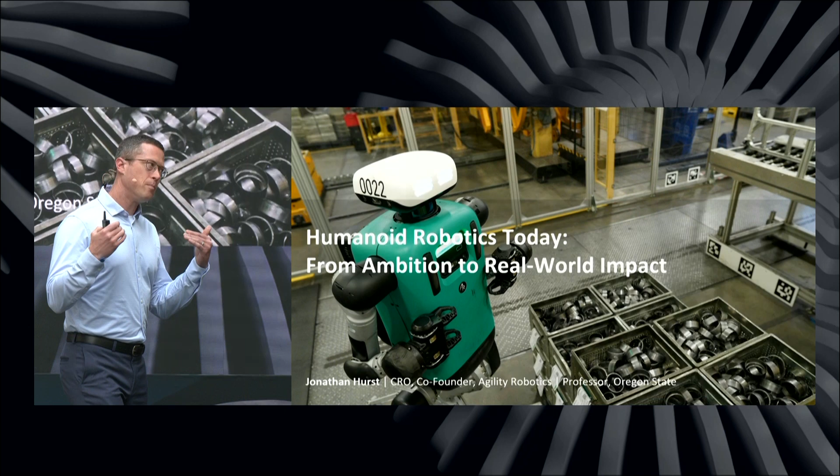I'm going to talk today a little bit about how we go from the ambition of having humanoid robots that are part of everyday human life, multi-purpose, useful in many places, but how we start with that, how we have real-world impact right up front on our path towards this big dream.

I think this is the best crowd to really agree with me that embodied AI is the future of labor. We're going to have machines that can physically do most of the things that people can do, and many more things beyond that, and that's going to fundamentally change how we do labor.

Today, it starts in things like logistics and warehousing and some simple, more focused tasks, but over time, it's going to gradually broaden towards more manipulation tasks, better and better dexterity, and other things to get out into more and more broad markets.

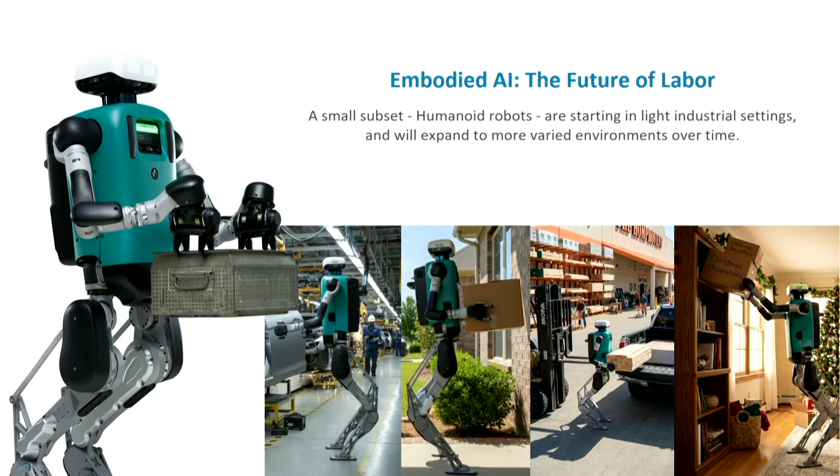There are two big main ways embodied AI broadly, but also humanoids, are going to impact our economy. Number one is basic capacity - just the limit that many industries have on the services they can provide to customers because there are not enough people to do the jobs and do the roles. Especially with demographics changing and population shifting, this is a really important one.

But also basic capability. You can ask the question, how many blacksmiths does it take to build a laptop? Of course, blacksmiths can't build laptops. You have to ladder up the technology to get to the point of creating something like that, and embodied AI is going to do that. Now that's the hardest to predict - it's hardest to know what we are going to be building in the future that these embodied AIs allow us to build, but I do believe this is going to be a major important factor in our economy.

So the big question is really important to ask, and it's important for anybody building humanoids to ask this: why a humanoid? Is it even the right way to do it, or should it be something else? I would say we are building human-centric robots because we want to operate in human environments.

And this is really a new era of robotics. Robots in the past have really - you've had to design the environment around the robots. Industrial robot arms, you design the process. Even AMRs, autonomous mobile robots, you have to have an environment and a space that's really suited for the robots.

But having human-centric robots is what allows them to be much more general purpose, more multi-purpose, because so many workflows have been designed around us. We've designed the workflows around us. So having a robot that can just walk in and do that workflow is very useful.

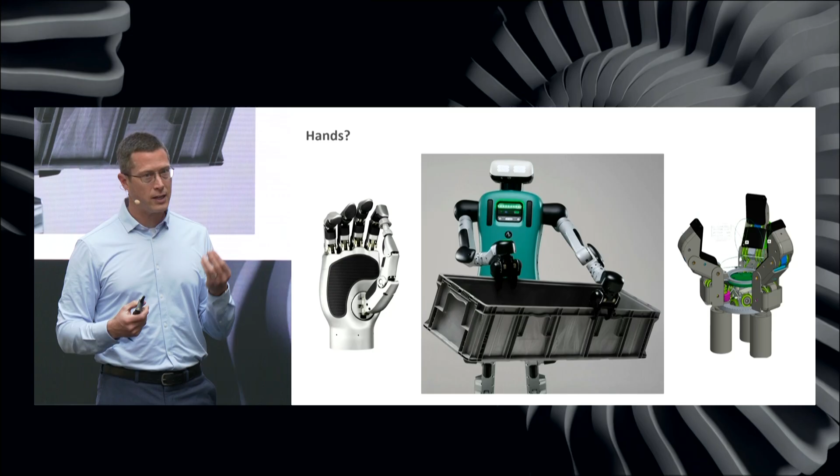Dexterity is one of the grand challenges in robotics. We don't do it well in robotics right now, certainly nowhere near human dexterity. And I think when you copy it, it's kind of like the Disney Hall of Presidents - it's an animatronic. It maybe looks on the outside a bit like a person, but it's missing all of the most important things like force control and compliance, and of course the intelligence in order to create that dexterous behavior, even if the hardware is physically capable.

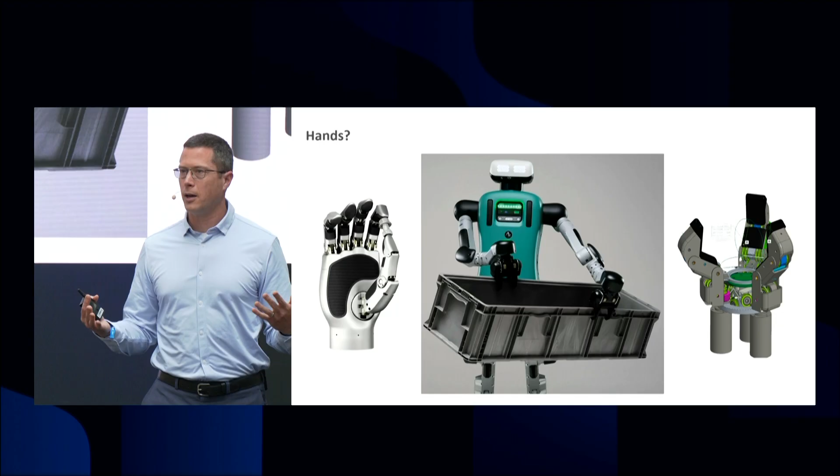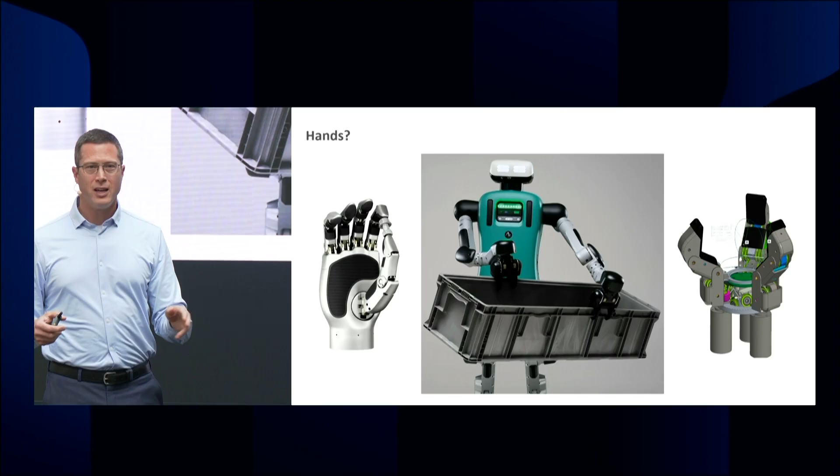Now, I think down the road, we may be going by 2 or 3 fingers to start with. We see in the Cybathlon, a competition in Europe where disabled people can augment themselves technologically by adding whatever they want - amputees can have manipulators, and then they do a manipulation challenge which just pragmatically measures what they can do. And the winner the last 2 years has been a parallel jaw gripper, a very simple parallel jaw gripper with a 1 or 2 degree of freedom wrist.

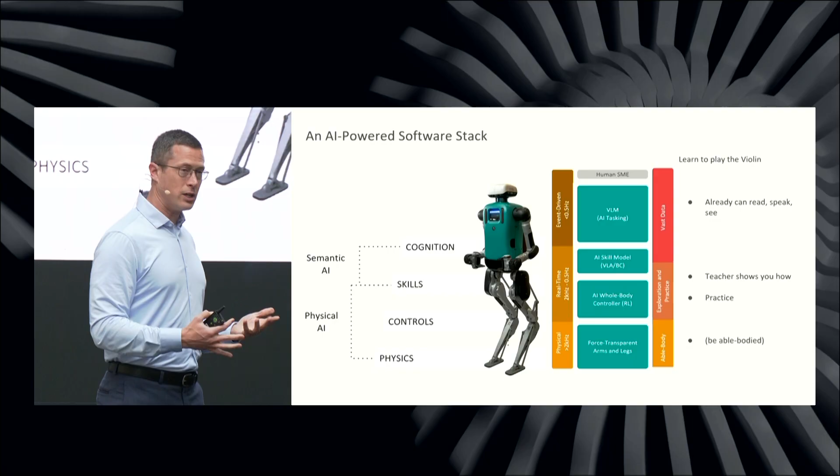So that tells us something about if we really want to achieve dexterity, we've got to think about this from the first principles approach and not just copy the way that people look. Now, the intelligence is a huge part also of how you need to solve this grand challenge of manipulation and whole body control and locomotion, all of these things.

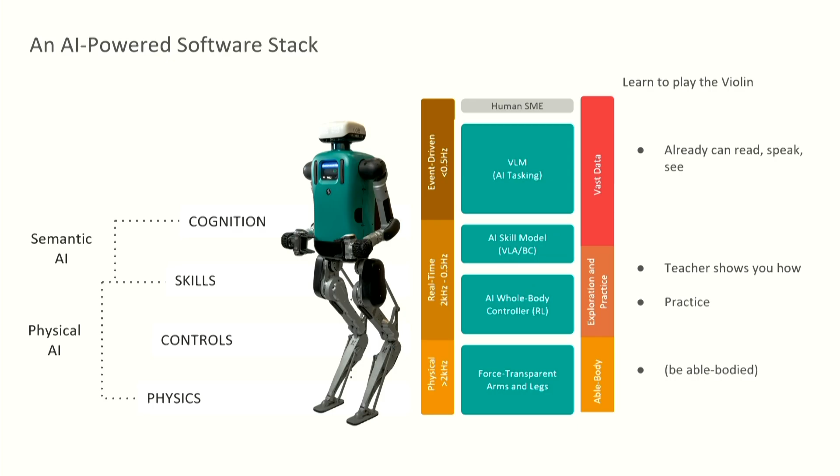And I think it's very important to point out that there is no single silver bullet. There is no black box of AI. There is a big tent of computational tools that are all very valuable in creating the behaviors that we want, and different tools are useful in different locations.

So I already talked about the hardware. It really has to be special. You have to get the physics right of the mechanical system. It has to be back drivable, have good force control, be able to have good compliant interaction with the world to make it even possible for any software, no matter what it is, in order to locomote and manipulate things in the world.

At the high level, at the very top of this stack, we see large language models and vision language models and things like that that could be trained off of the entire internet. And that helps with context and solves perception and so many things.

But it cannot control an individual robot. It cannot control the torques to all of the individual motors at every instant in time, given the particular sensor inputs, because there is no source of data that provides correct examples of that. That has to be discovered.

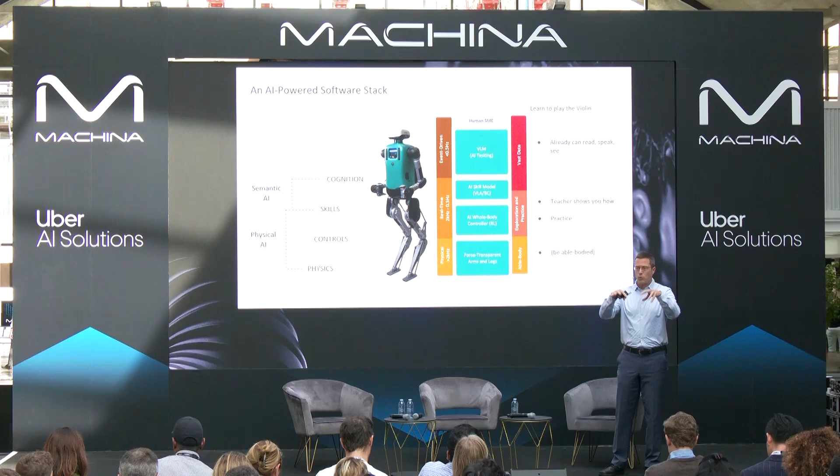So there's two ways to do that. One is you teach the robot via teleoperation, animation, motion capture, or other examples. And we see that for teaching the robot complex skills, like how do you grasp things. That's learning from demonstration. But then robots have to practice.

Robots have to use reinforcement learning and simulation, and in real life on physical robots, in order to refine that, in order to actually get the high performance that robot is going to be able to achieve, beyond what a person controlling a robot would be able to do. So all of these things, there's a lot here.

So the question is, how do we get to this? If we solve these grand challenges in robotics, we can have these machines working with us and helping us in our homes. I certainly hope to have this within my lifetime.

But today we can start with picking up bins, picking up totes, doing things in warehouses and logistics, doing useful work that customers are willing to pay for right now that provides a return on investment and lets us learn all of the very hard things about deploying robots. There's a lot about information security, about all the metrics of uptime and servicing these robots, and safety is the big one I'll talk about.

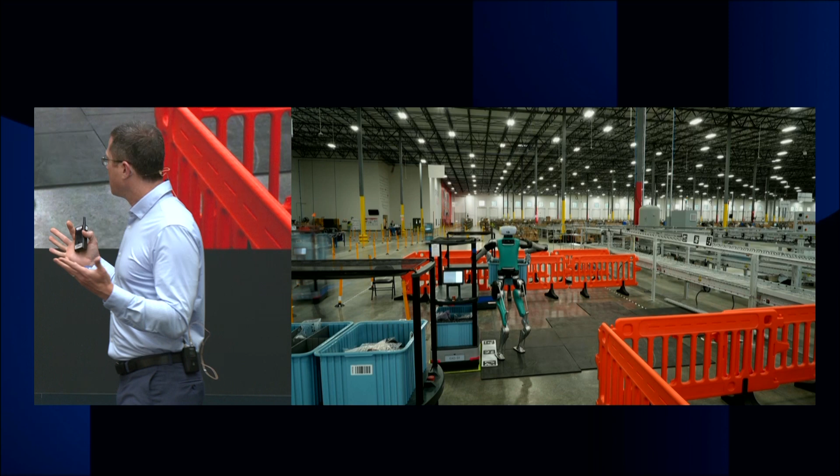So we have deployed Digit doing work like this in a GXO warehouse. You can see that Digit is picking up bins off of the autonomous mobile robot and putting it on a conveyor belt. This is something we've been doing for almost two years now, and this is a commercial deployment.

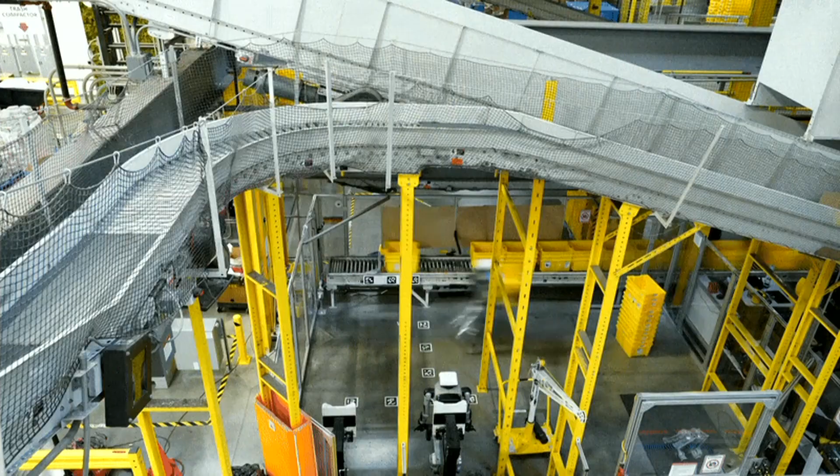Here it is at Amazon, stacking totes. You can see it's a different workflow, but very similar in many ways. So we're kind of scoping a multi-purpose task within a range of scope and can gradually build that scope over time.

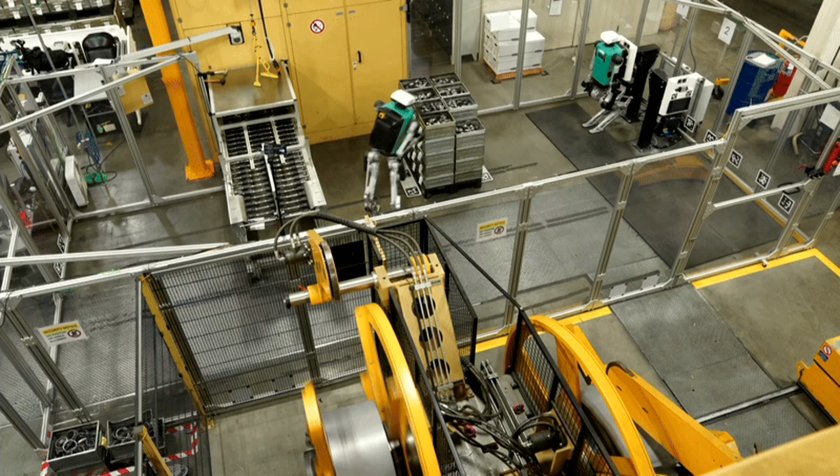Here it is at Schaeffler, loading dirty, oily parts into a washing machine. So these are fairly heavy. These bins are sometimes damaged. They're always a little bit different, always a little bit different weight, with shifting weight inside of it. And Digit's just doing this basic workflow.

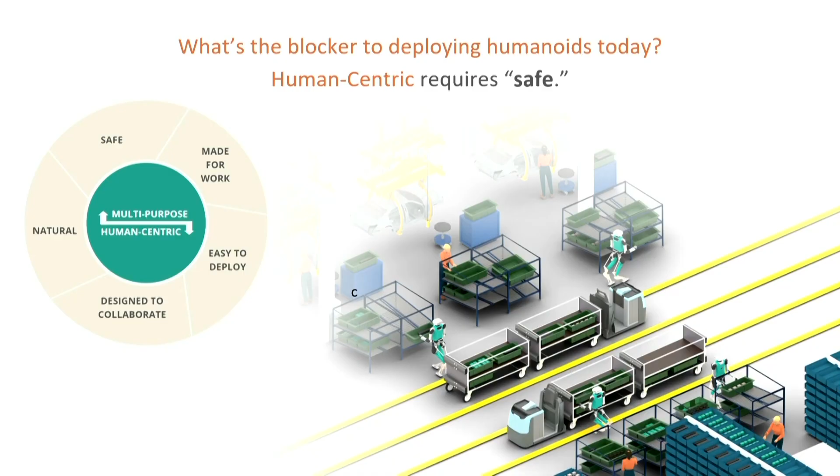So what's the real blocker? Yes, we've deployed, and we've been deployed for a couple of years, but really it's safety. I'll go back a couple and you can see there's a work cell around this robot. There's a physical barrier that is separating this machine from any people that would be nearby. This is the only way that we can operate within the existing regulatory environment that we know of.

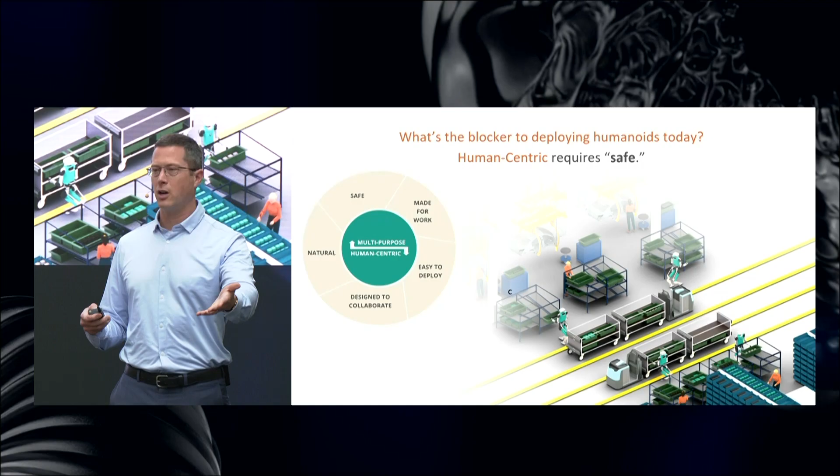Any dynamically stable, any balancing machine is going to need to be behind a physical barrier like this, which really limits its utility. A robot that has to be in a cage is not very multi-purpose. It's not utilizing the benefit that a humanoid robot can actually utilize. Being human-centric requires being safe. It requires being able to go out into unmodified human environments. And safety is the blocker right now because these robots can do the physical work.

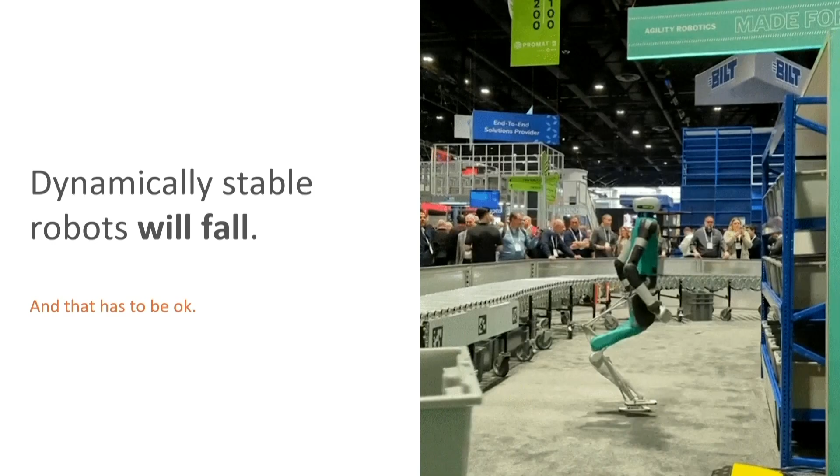So step one, I'll start with this: you know the robots will fall. That's unavoidable, that has to be acceptable. It has to be okay if the robot can't land on somebody's foot and cause even a basic injury like that. Basic pinch point kinds of things, right?

But beyond the basic pinch points and hot surfaces and the robot falling, judgment errors happen when a robot is making intelligent decisions in an environment. You don't want it to pour hot coffee in your lap or start the dryer when there's a kid hiding in there because they're playing hide and seek, or any number of things like that we haven't begun to envision yet, but will be necessary before we can deploy these in homes.

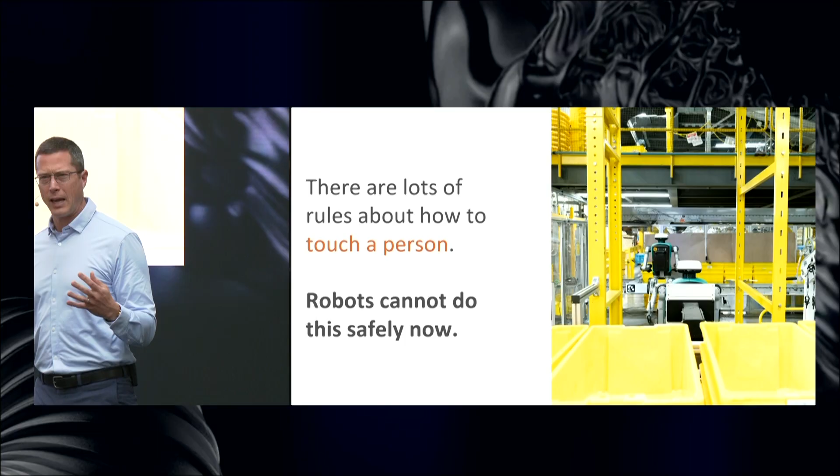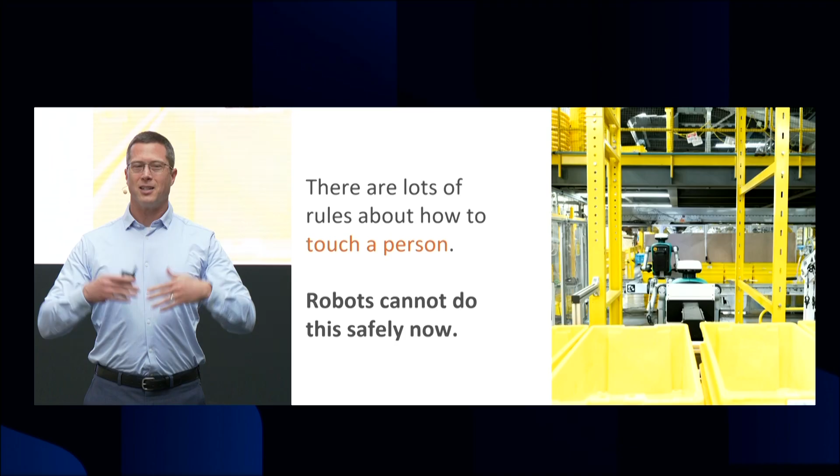There's a lot of rules, even social rules, but also basic safety rules. A robot has to make intelligent choices about whether it touches you on the shoulder or the eyeball, and which one is okay. It has to do that not just 90% of the time, but statistically true to some number of nines percent, validated by third parties, such that insurance companies can understand the risk they're undertaking. It is a huge, very high bar to get there.

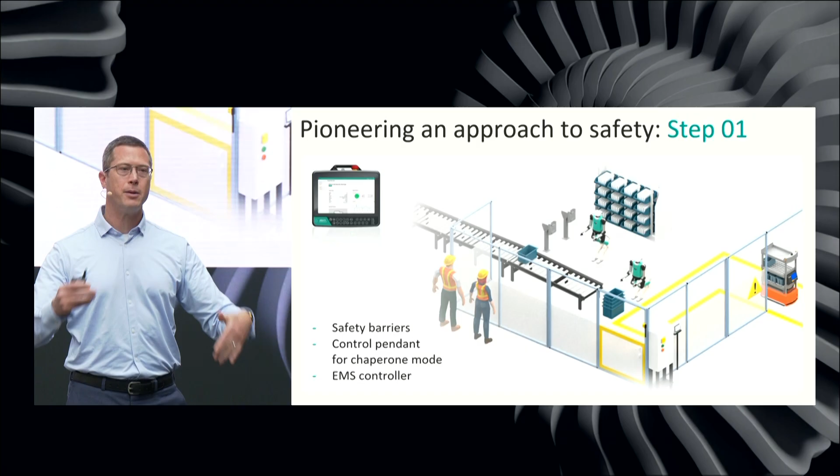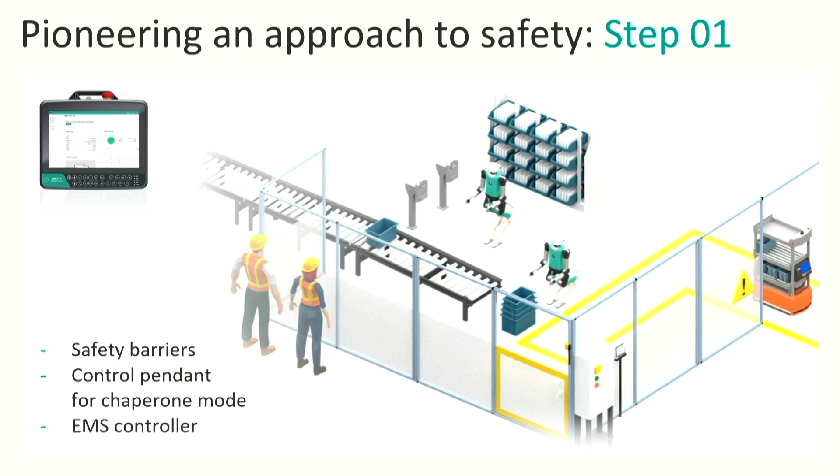And they cannot do this now. So step one is operate inside of the safety cage. But a whole bunch of other things too, like a control pendant, safety-rated power electronics, safety-rated data bus, so that when you hit the e-stop, you have a well-known and well-understood behavior that a third party has validated. It's not just you stating that this should work. It's somebody else who's gone through this design with a fine-tooth comb, and it's a lot of certification.

Step two, and this is what Agility is releasing later this year with our Digit V5 robot, is a machine that can detect people around it and change its behavior as people approach. The robot can slow down, stop what it's doing, set its load down on the ground, and even get down and sit down and turn power off before a person can touch it. This allows a robot to get outside of a safety cage, outside of a work cell, and still operate in human environments, near and among humans.

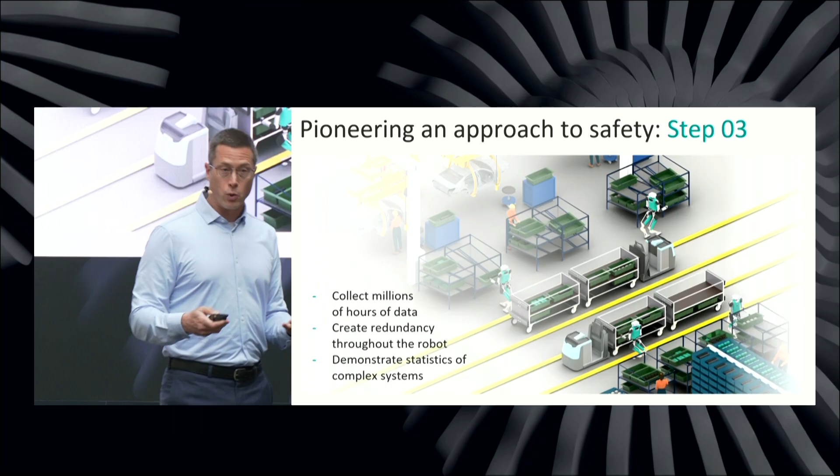Now that's a necessary step in order to get to step three, which is where we'd really like to go: robots being able to make intelligent decisions about what they can touch and how they can touch them. We believe this is going to follow a similar path to what we've seen from autonomous vehicles. With autonomous vehicles, we had safety drivers and collected millions of hours of data to start predicting what a pedestrian or bicyclist will do and react appropriately in a way that allows these robots to be autonomous.

Now, of course, with a humanoid, the complexity is vastly greater than cars on the road. Cars have two degrees of freedom; they can go faster and slower, and steer right and left. Humanoids, of course, have so many more degrees of freedom. And roads are far more structured than homes and workplaces and social rules and human environments. And we cannot have safety drivers on a robot.

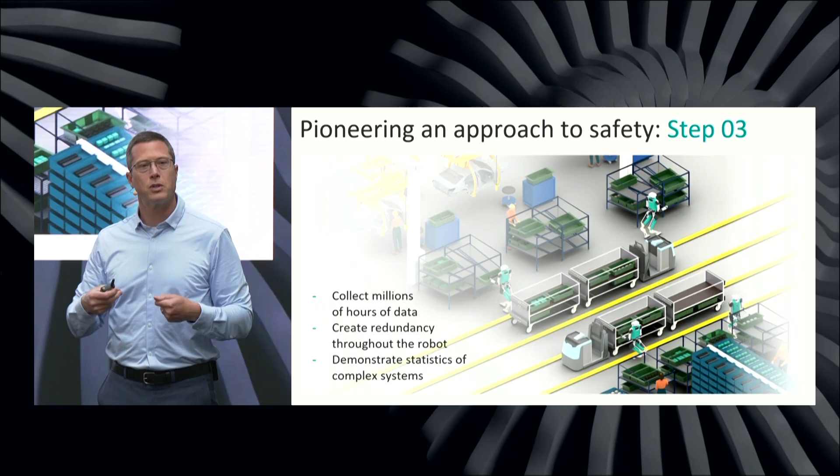There's no real way to have a robot be safe and also productive if you have a person controlling it the whole time. That's why step two is important, because now we can have a fleet of thousands and thousands of robots deployed, doing useful work, collecting data, while we build the safety setup for the intelligent decision-making of a robot, and build the statistical case that shows reliably these robots do what we expect and make intelligent choices. That's how we get to robots that operate safely among us, and even get to the point where you can hand them something and physically interact with a humanoid robot, which is not possible today.

So we want to start with what robots can do right now, and that's logistics and warehousing and that kind of semi-structured industrial work that's still too unstructured for automation to serve right now. People are still doing this task, but Digit can walk in and start doing this job and be a source of automation without installing additional infrastructure.

And then we continue to build out the use cases in terms of each picking and dexterous manipulation and safety, and get into broader and broader markets, covering more and more of general labor and physical work in the world. This is the path. In order to get to broad, general-purpose capability, we need to start with focus. If you're going to do 100 use cases, you start with 1, then 2, then 3, and work your way up.

What's really exciting about humanoids, which is not the case with autonomous vehicles: an autonomous car has to be fully safe and fully autonomous above a certain bar before it's useful. A humanoid robot can be in more semi-structured environments today, step out of the work cell today, and be useful, getting to the scale of hundreds of thousands of robots and being a huge market even very early here, in logistics, warehousing, and manufacturing.